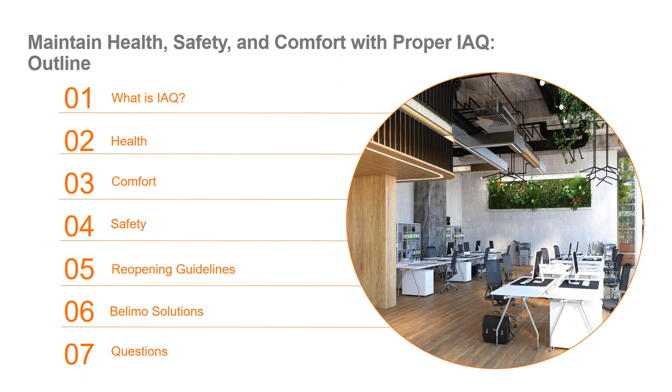So what is indoor air quality? Indoor air quality is defined by the EPA as the air quality within and around buildings and structures, especially as it relates to the health and comfort of building occupants. Understanding and controlling common pollutants indoors can help reduce your risk of indoor health concerns.

There is a big emphasis on IAQ in the HVAC industry, as it is very relevant to what is happening with the pandemic in the world today. So it is important to understand IAQ and evaluate your building for improvements for a number of reasons.

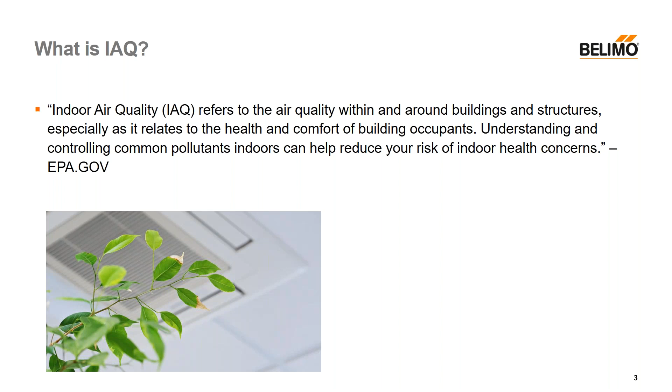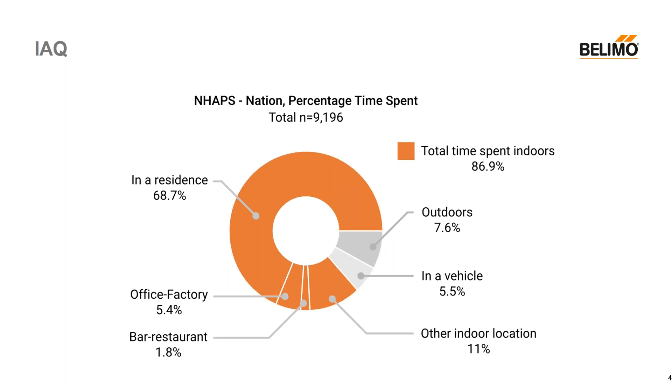Just from this alone, we can see why IAQ has become a bigger discussion. What is in indoor air that can impact our health and comfort? Some of them are as follows.

Airborne particles can consist of pet dander, carbon monoxide, dust, pollen, and wood stove emissions. Examples of household odors and gases can include odors, radon, pet smells, cigarette smoke, sink or drain smells. Volatile organic compounds, or VOC for short, include paints, chemicals, carpet emissions, and cleaning supplies, whereas microorganisms are bacteria, mold, fungus, and viruses.

Now let's take a look at some of these to understand the harmful effects they can have to our health.

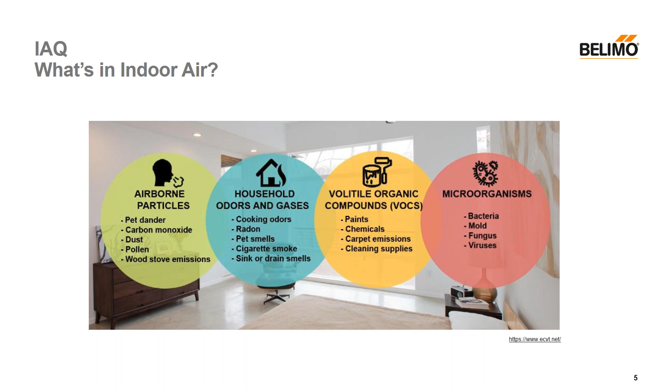Airborne particles are measured in microns or micrometers. 1 micron is 1,000th of a millimeter. Particles under 10 microns are easily inhaled and they can reach your lungs. Particle matter that is 2.5 microns can penetrate the respiratory system. Ultrafine particles, smaller than 0.1 microns, are so small that they can penetrate your bloodstream and be transported throughout your body, causing even further various health risks.

To put this into perspective, an average single piece of hair is about 70 micrometers in diameter, making it 30 times larger than the largest fine particle. Airborne particles can be dangerous to our well-being.

One direct link to poor indoor quality and health is something called sick building syndrome. Sick building syndrome is used to describe situations in which building occupants experience acute health and comfort effects that appear to be linked to time spent in a building, but not specific to an illness or cause that can be identified.

$60 billion of revenue is lost alone to sick building syndrome a year. Breathing in these types of particles can even cause longer lasting health effects such as respiratory disease, heart disease, and cancer. Maintaining a higher IAQ will improve your occupants' health greatly.

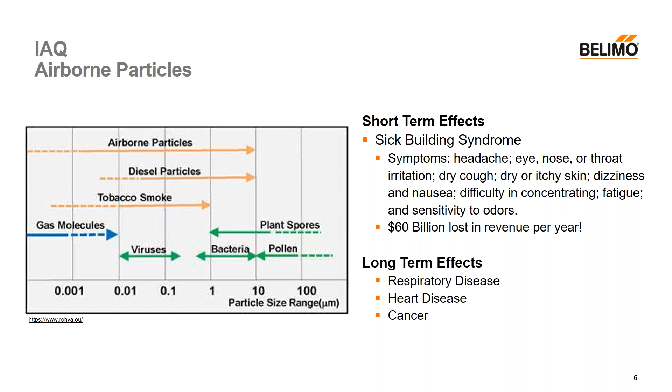Along with the VOC sources shown previously, VOC can also come from sources such as softeners, perfumes, and cleaning agents. These pollutants have been studied to be 2 to 5 times greater indoors than outdoors. When exposed to VOC, various health impacts have been linked to them, including sore throats, itchy eyes, irritated skin, fatigue, headaches, and chemical reactions.

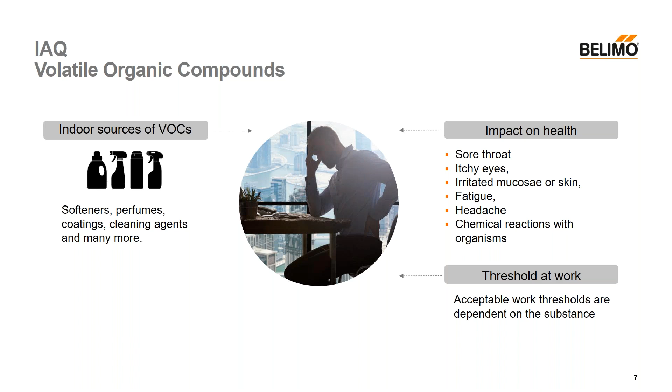The level that is acceptable is dependent on the substance. Monitoring VOC levels can help keep your occupants safe and healthy from these effects.

CO2 is talked about quite often with indoor air quality. The main reason is that it has been linked in many studies showing that maintaining a certain level of CO2 will improve your IAQ. CO2 is odorless, colorless, and tasteless, making it that much more important to monitor, as you won't know from your senses.

CO2 is measured in parts per million, and there are various health risks when CO2 levels rise. 400 ppm is a normal outside level of CO2. When levels start to reach 1000 to 2000 ppm, occupants of the space will have symptoms such as drowsiness. 2 to 5000 ppm is where adverse health effects happen, such as headaches and loss of concentration. 5000 ppm is the permissible amount for daily workplace exposure.

Over 40,000 ppm, you'll be getting to very dangerous levels that can start to cause oxygen deprivation. ASHRAE discusses the range of CO2 levels that they recommend in the reopening guidelines that we'll discuss later.

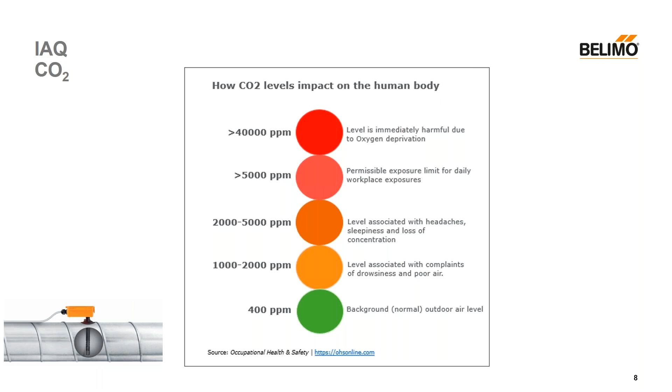Relative humidity is also another important factor when it comes to IAQ. Relative humidity is how much water vapor is in the air compared to how much it could hold at that temperature, so it takes into account both humidity and temperature. Relative humidity is shown as a percentage.

A lower relative humidity and a higher relative humidity both give you a higher chance of exposure to unwanted effects from bacteria, viruses, and respiratory infections. 40 to 60% relative humidity limits the exposure and dramatically reduces the risk of disease transmission. This range is also an ASHRAE recommendation in their reopening guidelines.

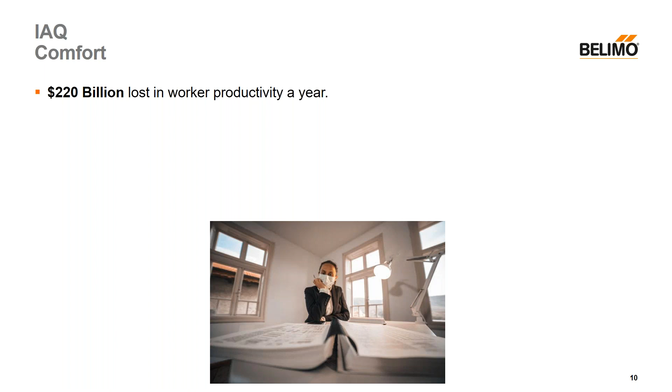Not only do we want to protect occupants from harmful effects of poor indoor air quality, but we want them to be comfortable in the workplace environment. Comfort and proper IAQ have a direct impact on productivity. Poor indoor air quality leads to a loss of $220 billion a year. There have been studies done that have proved that with higher IAQ, productivity increases.

One study done by the World Green Building Council has shown an 11% increase in employee productivity as a result of increased fresh air to the workstation and a reduction in pollutants.

Another study, done by Harvard, was a cognitive test study and showed 60% higher results in a green space than those in a typical office setting. It went up by 100% with improved ventilation and no VOCs.

Inadequate ventilation is one of the main causes of poor indoor air quality due to design or not having the proper setup. Increasing ventilation systems can lead to improved productivity and well-being.

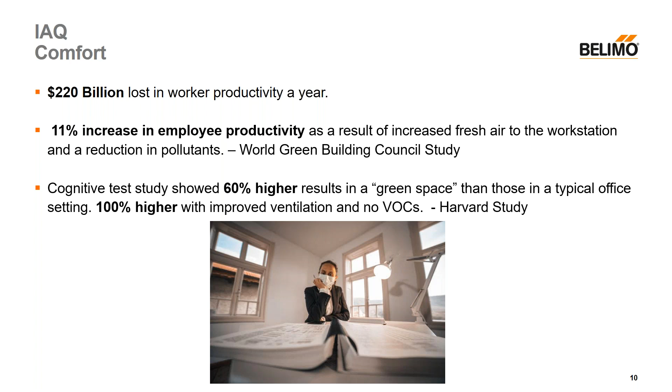So what can we do to maintain proper IAQ? In the easiest of terms, we can monitor, check, and ventilate.

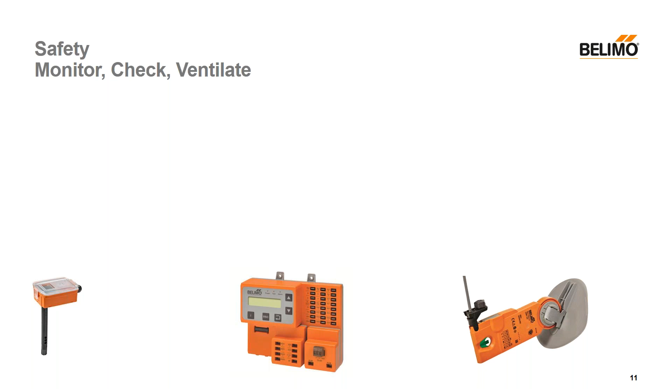We can monitor VOC and CO2, monitor temperature and relative humidity, have a DCV system installed, check and monitor pressurization, change our filters more frequently, as well as monitoring them with a differential pressure switch.

Purge before occupancy and post-occupancy. Maintain ventilation. Bring in more outside air when possible, including running your dedicated outdoor air systems. Have exhaust fans installed, and check your control sequences and control devices for proper setup and that everything is working at its optimal performance.

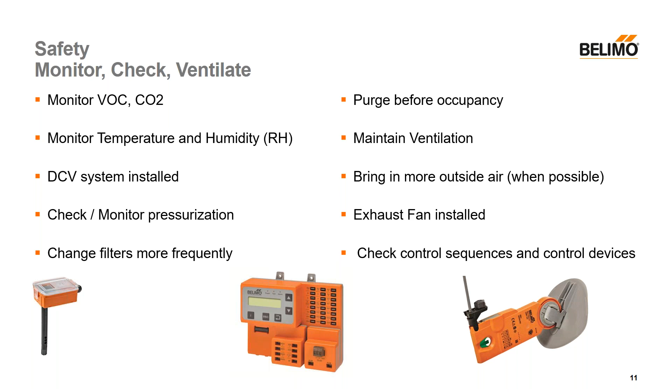ASHRAE also has recommendations when it comes to reopening guidelines due to the pandemic. They can be found on their website, but some highlights include reviewing HVAC programming to provide flushing 2 hours before and post occupancy. This includes operating exhaust fans as well as opening the outside air damper.

Run the system on minimum outside air when unoccupied. Operate in occupied mode when people are present in the building, including times when the building is occupied by only a small fraction of its allowable capacity.

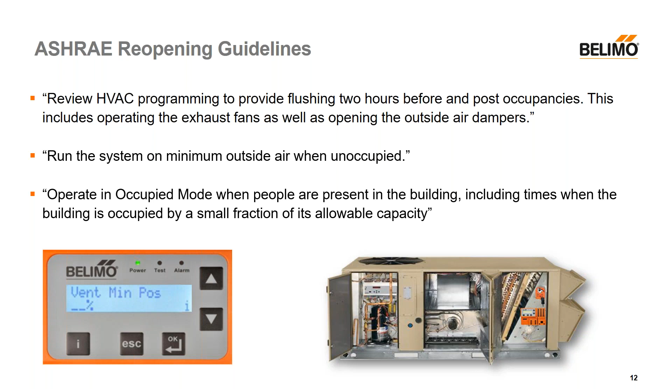Maintain proper indoor air temperature and humidity to maintain human comfort, reduce potential for spread of airborne pathogens, and limit potential for mold growth in building structures and finishes. ASHRAE Standard 55 recommends a temperature range of 68 to 78 degrees dry bulb, and recommends limiting the maximum relative humidity to 60% and the minimum relative humidity to 40%, if appropriate for your building.

If demand control ventilation systems using carbon dioxide sensors are installed, operate the system to maintain maximum CO2 concentrations of 800 to 1,000 parts per million in occupied spaces.

A note on DCV systems is that during a pandemic crisis, ASHRAE suggests considering adjusting to maximize outdoor air or disabling operation of DCV if it will not adversely impact operation of overall systems. This is a temporary recommendation while operating under an infectious disease crisis.

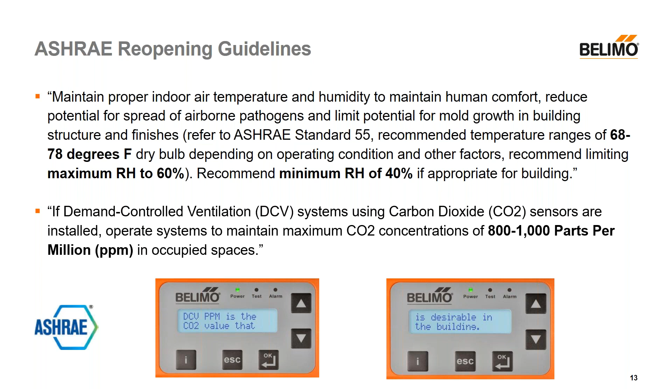Now we'll look at Belimo solutions and how we can help you maintain proper IAQ. The first product is the Belimo Zip Economizer. The Zip Economizer has patented zip code technology, which takes the guesswork out of your high limit changeover strategy.

Simply enter your zip code during setup, and the Zip Economizer will give you the exact setting you need for your climate zone to optimize free cooling in compliance with ASHRAE and California Title 24. Both USA and Canada zip codes can be entered, and this eliminates improper changeover value.

The Zip Economizer has adjustable settings such as changing the high limit temperature, your ppm for DCV, and how many compressors you want it to recognize. It can recognize up to two 15-ton compressors, so a total of a 30-ton unit, and your minimum ventilation position.

There are also over 30 alarms within the Zip that will tell you if something isn't functioning properly, such as sensor out of range, helping with maintaining proper IAQ at all times.

The plug and play capability of the Zip is that if you don't have a module connected, then you don't have to worry about the settings loading up. If you have sensors plugged in for a differential enthalpy strategy, then it'll recognize it right away and comply to the codes for that specific point.

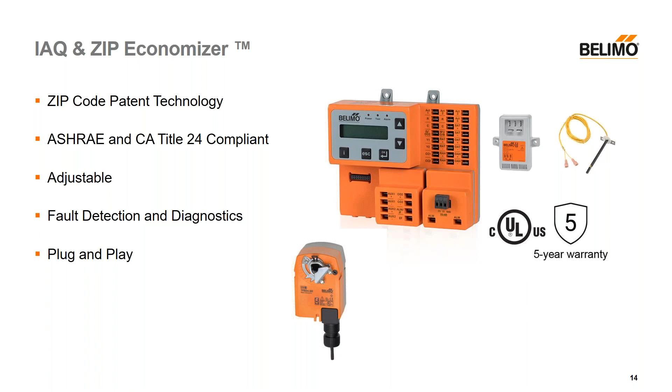The Zip Economizer's energy module will maintain proper IAQ and be a solution for ASHRAE's reopening guidelines recommendations in a number of ways. There is an exhaust fan output to make sure that you're getting stale air and harmful airborne pathogens out of your building.

Demand control ventilation monitors and opens the damper when it exceeds the ppm set point you set, such as the 800 to 1,000 ppm range recommended from ASHRAE.

A remote damper override setting for use with a potentiometer so that you can override the damper position when needed to increase outdoor air coming into your building.

There is also an indoor fan output to retrofit 2-speed fan control applications, and a purge functionality for pre and post occupancy to get contaminants out of that zone.

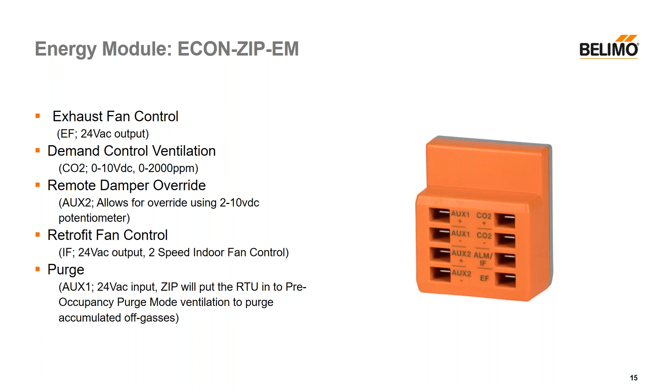Belimo also offers a sensor line of products to monitor IAQ. Belimo humidity sensors are 2% accurate as standard across the range, ensuring the comfort levels in the buildings are controlled to the optimum conditions and comfort levels.

Outputs can also be configured to measure enthalpy or dew point for optimum outdoor air ventilation, DCV, and building conditions. Some other features include multi-sensor with selectable output measurement values, up to 4 active temperature measurement ranges, and a sensing element not affected by high humidity and contaminants.

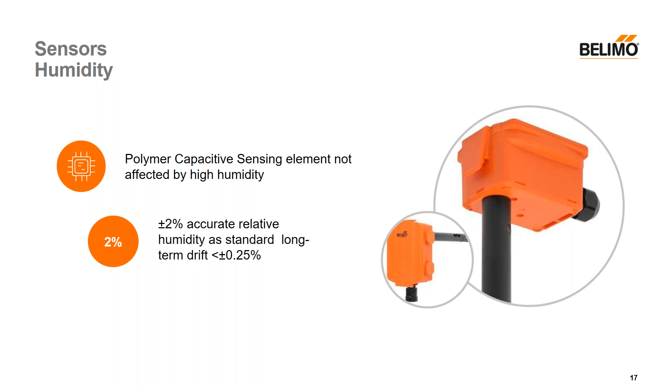Our CO2 sensors are based on dual channel self-calibration and non-dispersive infrared technology, and that applies to all applications. We have integrated temperature, humidity, CO2, and VOC sensors that are maintenance free.

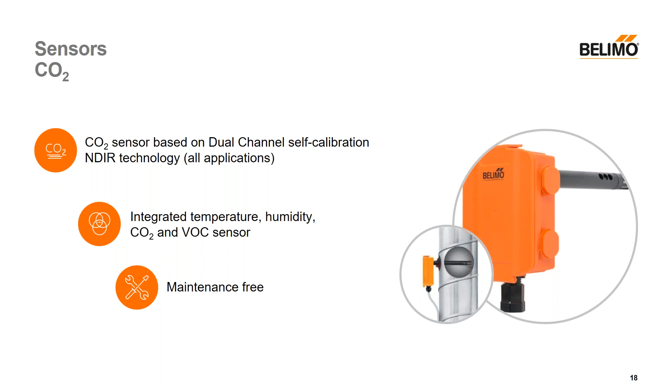Our Belimo air pressure range has some features that include 0-point stability, high accuracy, an auto zero option, and 8 field selectable pressure ranges.

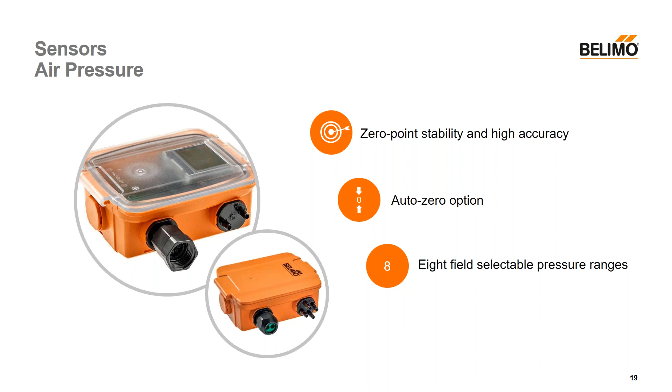Belimo also offers a line of airflow control and measurement products. Our airflow control VAV compact actuators use a constant flow offset in order to create pressurization. This can help prevent contaminants from spreading.

Some features include integrated pressure sensors, NFC for fast commissioning and adjustment, analog, BACnet, and Modbus options for controls. There are 45 and 90 inch-pounds options, as well as linear options for unique applications.

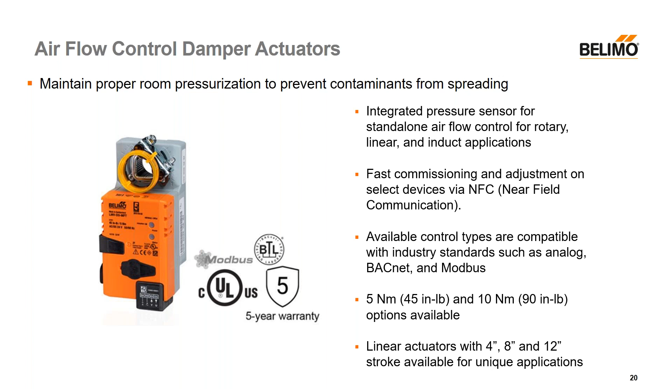Our airflow sensor communications module can help create a negative pressure differential when used in conjunction with a reference pickup and a room pickup device. An example would be preventing the spread in a COVID-19 patient's room with negative pressurization, ensuring it's safely exhausted.

There are 3 versions available. The first being the VRU-D3-BAC, which is a quasi-static differential pressure sensor for VAV and duct pressure applications.

The VRU-M1-BAC is a membrane differential pressure sensor suitable for contaminated air and also for VAV and duct pressure applications.

The VRU-M1R-BAC is a membrane differential pressure sensor suitable for contaminated air and for room pressure applications.

All versions are BACnet Modbus compatible. They all are NFC compatible. Just a note on this is that they are not listed in the 2021 PGPL, and the current version is not UL listed, but we wanted to get it out there for those who would like the product and all the functions it can help with your facility requirements for maintaining proper IAQ.

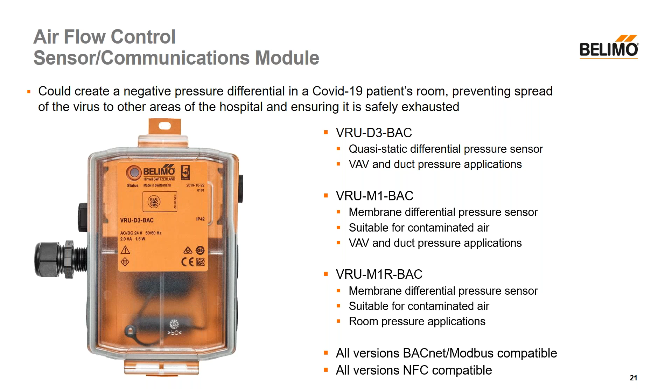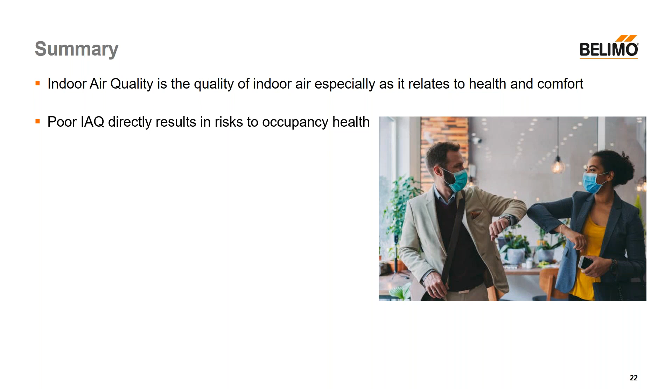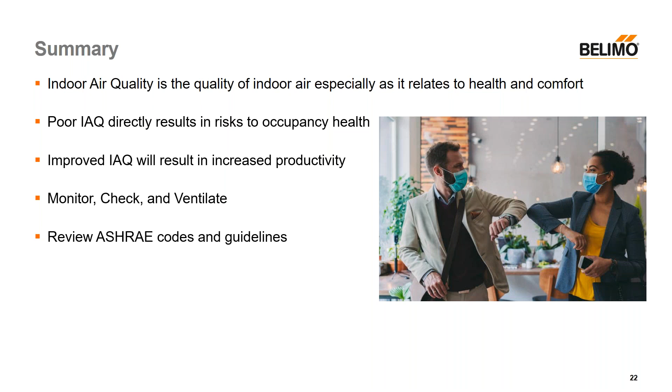So in summary, indoor air quality is the quality of indoor air, especially as it relates to health and comfort. Poor IAQ directly results in risks to occupant health, while improved IAQ results in higher comfort and productivity of occupants. You should monitor, check, and ventilate. Review ASHRAE codes and guidelines in order to be compliant and ready your facility during a pandemic or reopening process. Belimo offers reliable solutions to ensure health, safety, and comfort with proper IAQ.

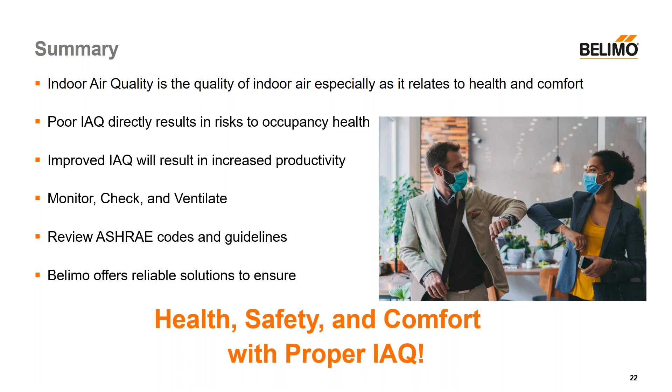That concludes the presentation part of the webinar. Thanks so much for attending and learning about IAQ and how it relates to comfort, health, and safety. My name is Frank DiPaolo. I am product manager responsible for the Belimo Zip Economizer. And now Ron will open it up for some questions.